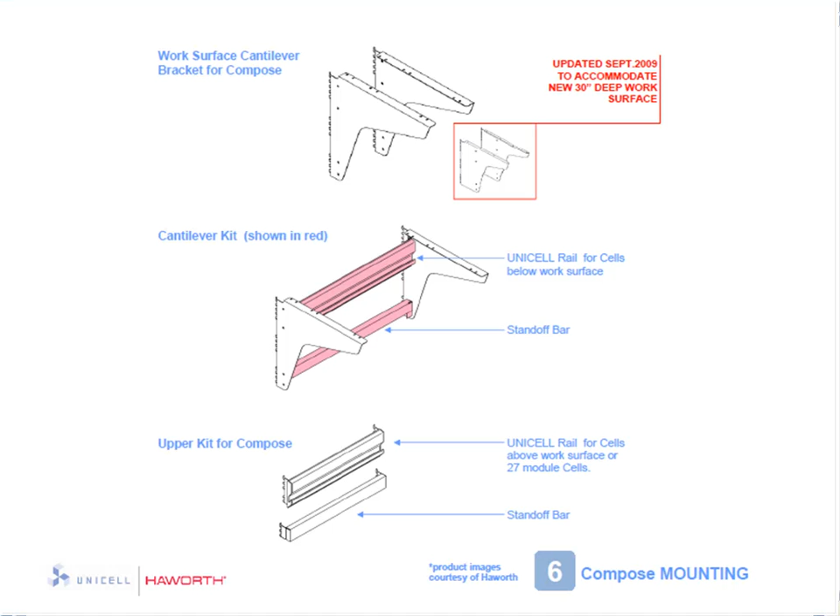Here is a photo that demonstrates the use of those components. Again, the upper kit is used for overhead position cells or shelf units. The Haworth Compose cantilevers plus cantilever kit is used for work surfaces and lower position cells. And also, the Haworth Compose cantilevers can be used on their own if cell storage below the work surface is not required.

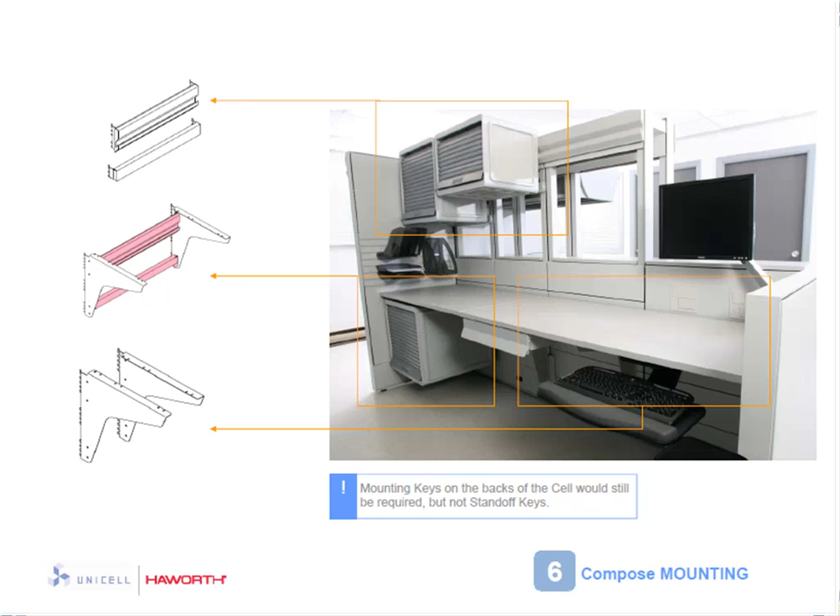I've created a summary sheet to show the differences between which components are needed for a wall mount application and then which ones are needed for Compose mount. One thing to point out regarding the differences between wall mount and Compose mount, the standoff key is required for cells in a wall mount application, but not in a Compose mount application. This is because the standoff in Compose mount is part of the cantilever kit and the upper Compose kit.

It is also important to note that only 25-inch deep work surfaces are used for wall mount and 30-inch deep work surfaces plus side corner brackets for Compose mount.

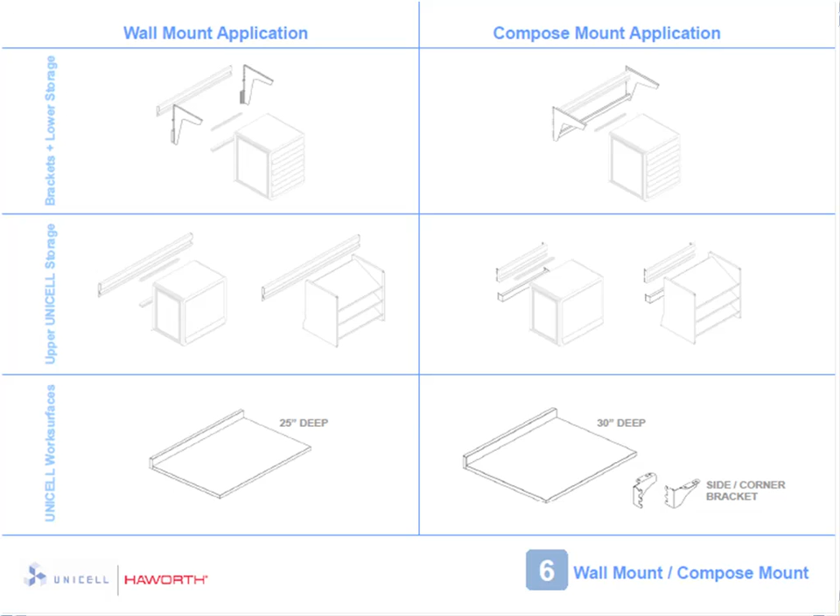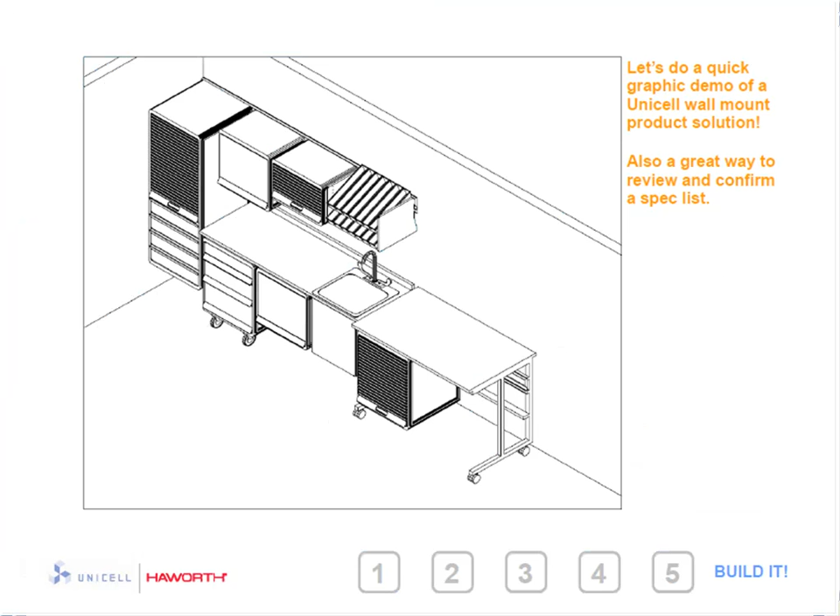Now that the main groups of Unicell product have been covered, including how Unicell integrates into Compose, let's do a quick visual exercise of the sequence that you may want to use to create a product plan using Unicell. This would also be a good way to check over a spec list in a SIF file to ensure you have all the correct parts and pieces. For example purposes, we will use a Unicell wall mount scenario.

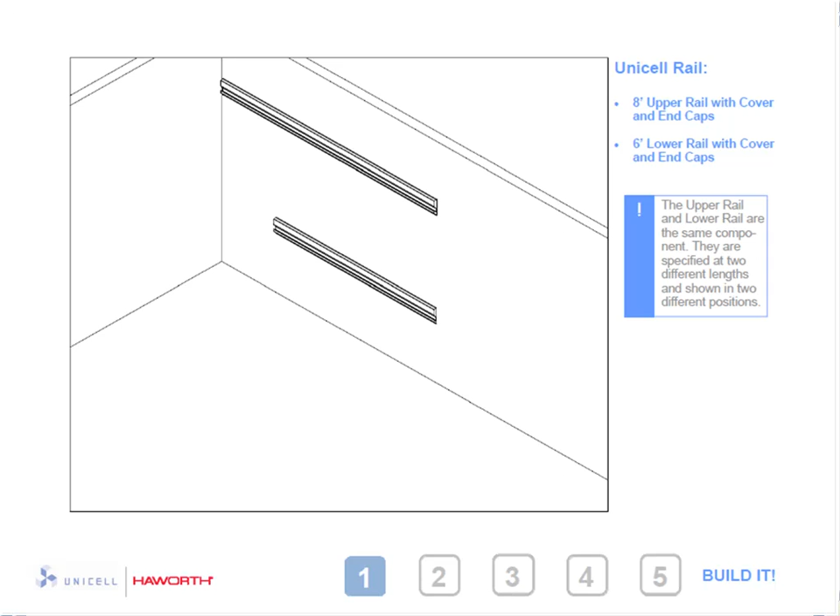As mentioned near the beginning of this presentation, the Unicell rail is always the starting point. Consideration needs to be given for both the upper and lower rail positions, depending on what the scope of other Unicell product is you have planned. In this instance, an 8-foot upper rail is required and a 6-foot lower rail. Again, these are the same product, just installed in 2 different positions.

Secondly, you would address work surface requirements in terms of size, material type, wall mount or mobile, and the number of brackets. Thirdly, think about your wall mount storage requirements, whether it is a Unicell cell assembly that you've created or a shelf unit. Be sure to check that all enclosures and interior components correspond properly to the base cell unit.

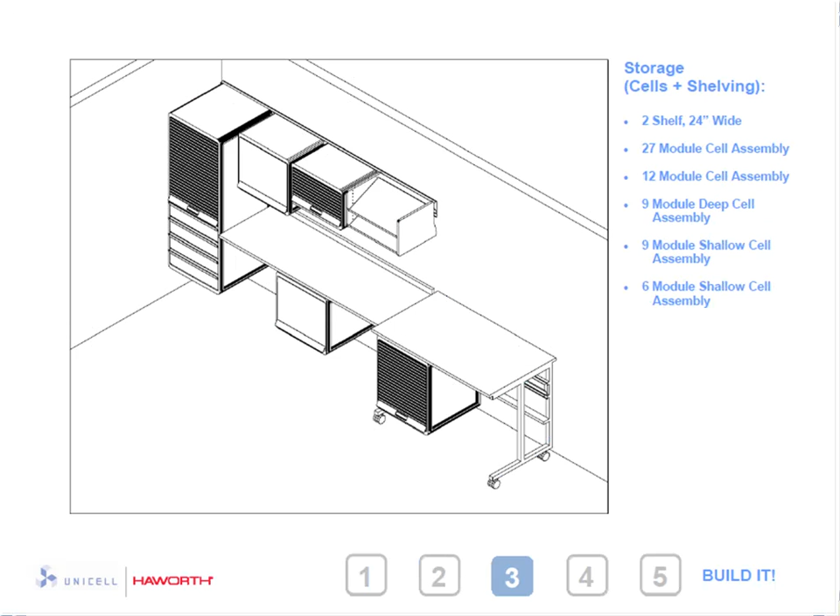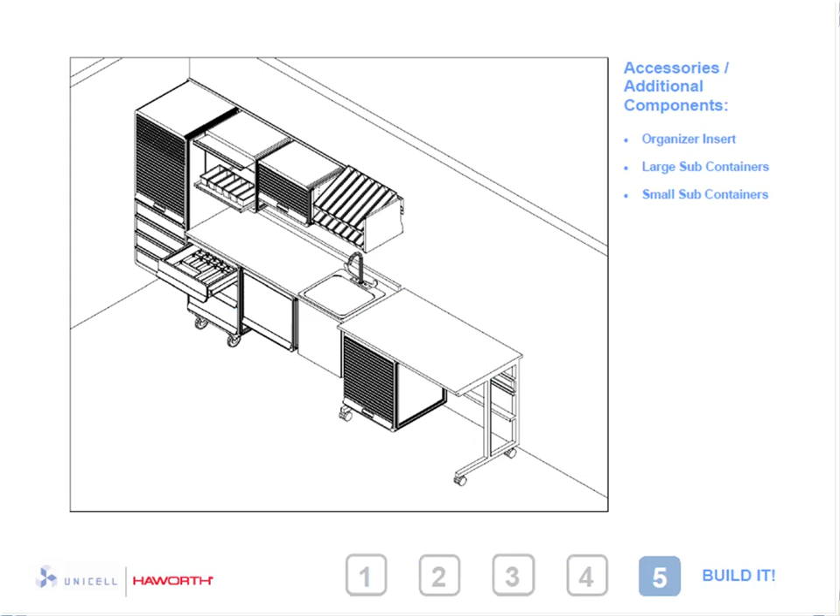Next, add any mobile components such as cells with casters, cells with dollies, or distribution carts. And lastly, specify accessories that are required to add into drawers, trays, shelf units, or in the case of the sink shroud, onto work surfaces. And there you have a basic Unicell product application.

Let's move on to the last module of this Basics of Unicell Product workshop.